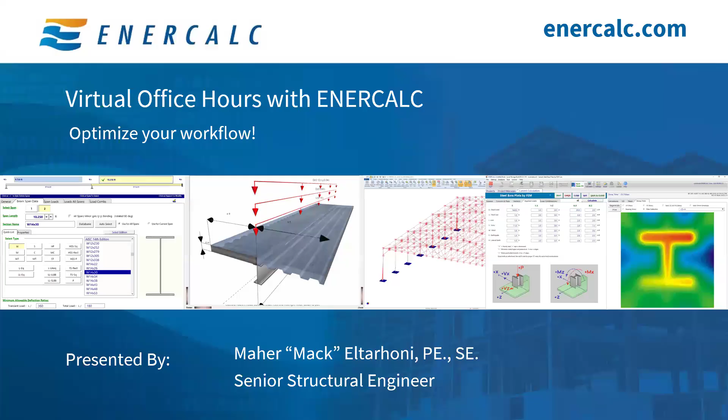As Seth said, I am Mack Eltarhoni, and I am excited to be presenting to you today not just one, but two modules from ENERCALC's library of diverse and extensive modules.

So I would like to start our session just like always with a brief overview of the overall agenda. The items that we're going to be covering today would be a quick announcement about the PDHs, then ENERCALC's latest build, what's new in ENERCALC, and then we're going to dive into the Rebar development module, live, and then the live load reduction module. After that, we're going to go briefly over registering for office hours to get notified in the future and wrap up with live Q&A from the audience. So feel free to drop your questions throughout the presentation.

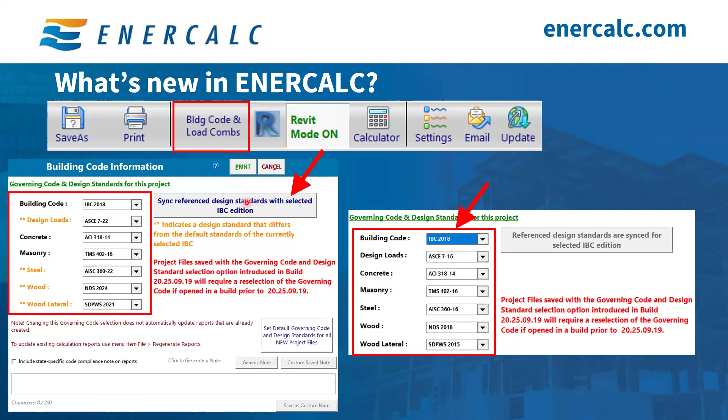Keep in mind all the code changes that you implement by clicking on this button right here, all of the stuff we just talked about, is only relevant to that specific project file or ENERCALC file that you're working on. So this only applies to the calculations housed within that file.

Now, if you want this code that you selected to be used as default for all of your future calculations, even if you create a whole new ENERCALC file for a brand new project, and you want to use the same IBC 2018 over and over again because that's what you have in your jurisdiction, then you need to click on this button. What's cool about this Set Default Governing Codes button is that when you click on it, you get this window and it will show you what the old default was. You can see here, building code was IBC 2018 and the ASCE 2022.

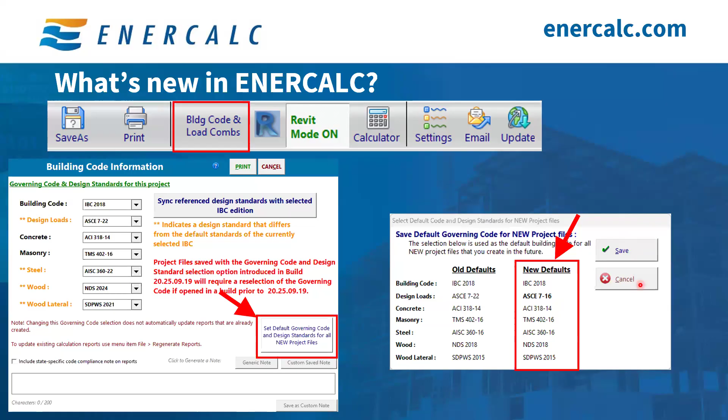They're the same ones that we talked about here. So those are the default codes, and the new codes that we want are the ones we wanted to change to 2018, having 2018 to match everything. So those are the new codes. You click save, and then voila, you'll have everything the way you want it.

Now, it is important to note that these new tabs will only show up if you have ASCE 7-22 selected in your code. So if the design loads that you're selecting is ASCE 7-22, then these three new tabs will start to show up. Now, if you are on an older version of ASCE, so if you're on ASCE 7-16 or older, then ENERCALC reverts to the old options with the menu to select the load and forces module the way that you typically used to do before the implementation of ASCE 7-22.

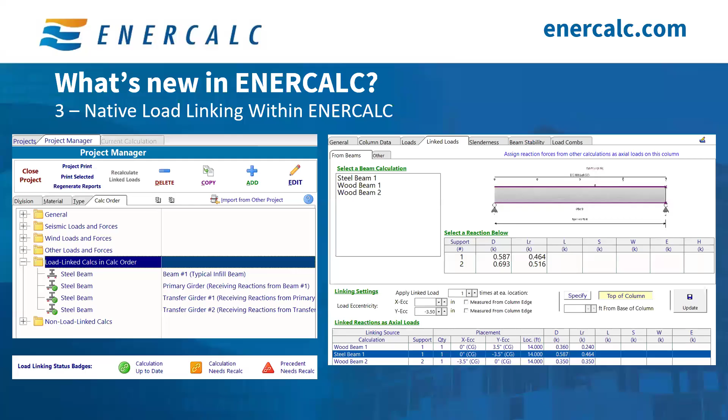So again, load linking is currently available in steel beams, wood beams, steel columns, wood columns, and more integrations to come. And if you'd like to learn more about load linking, we created a playlist of short videos on YouTube to walk you through how to use load linking step by step so you can start leveraging this tool in your workflows. And I also added a new video recently, in the past couple months or so, to the YouTube load linking playlist for a full practical example of how to use load linking in real life design applications to transfer reactions from beams to columns.

And the good thing about this example is that it covers different materials, so you can take it from a wood beam to wood beam, or from wood beam to wood column, steel beam to wood column. So there's a lot of mix and match going on here and back and forth. So this shows you the versatility of the tool. So again, overall, load linking is a powerful tool that allows engineers to create a well-connected chain of calculations while minimizing the risk of transcription errors.

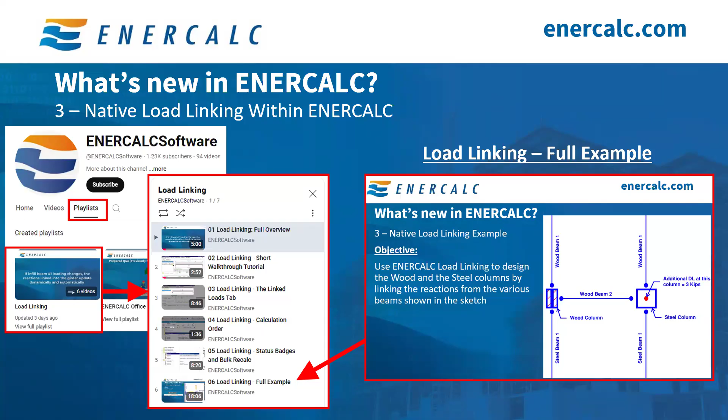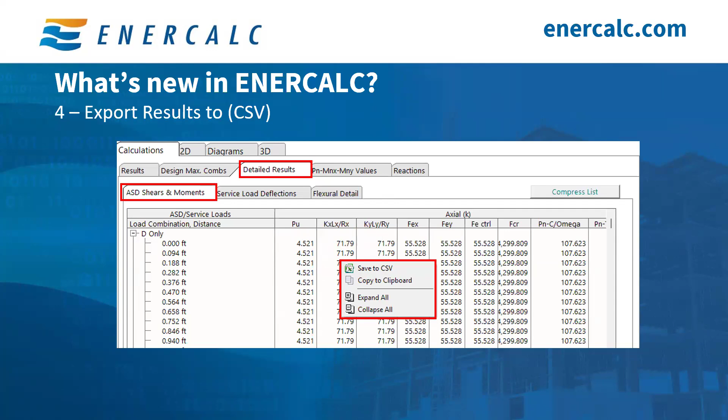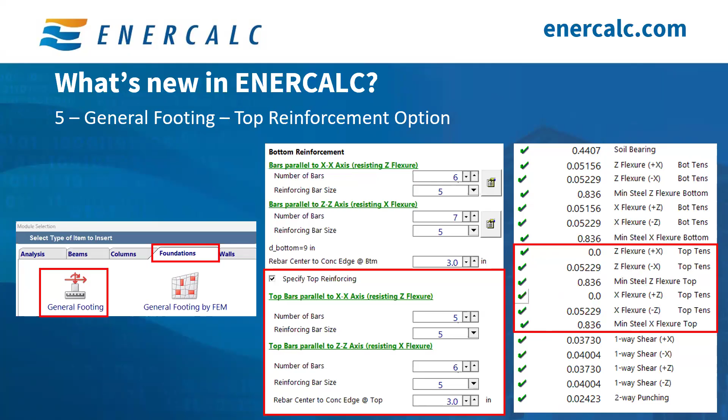And of course, another item that's been really exciting is ENERCALC for Revit. Especially for those who already use Revit to produce their drawings, this is a no-brainer. ENERCALC for Revit is just a simple plugin that goes directly inside Revit, and you can design structural members fully within Revit without having to export an analytical model or do anything outside of your normal routine. It's a simple point-and-click workflow that allows you to design a member, of course, in a fraction of the time that it would take you otherwise.

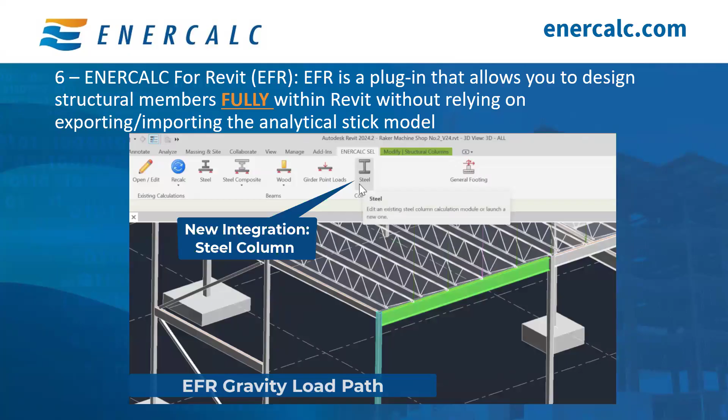But this is not just about time, but it's about transcription errors. You don't have to manually carry reactions. You don't have to manually change sizes. You don't have to do anything. Whatever change you do in ENERCALC, it automatically gets implemented in Revit, and vice versa. Whatever you do in Revit, it will change in ENERCALC.

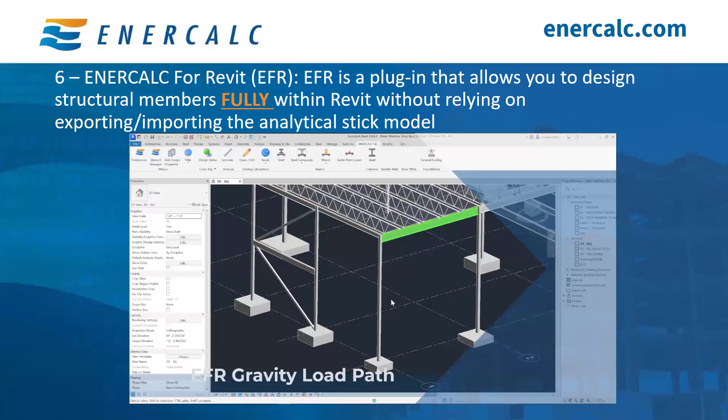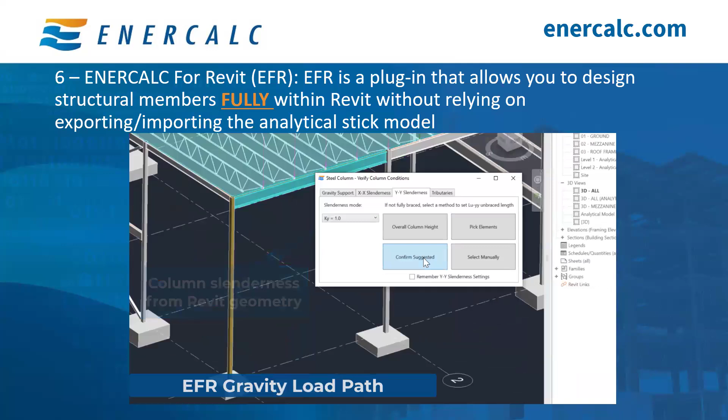So the best thing about it, you can click on a beam. It automatically knows the loads, and if it doesn't know the loads, it'll allow you to tell it where the loads are. It's just guided prompts that if you follow them, you can finish the process very quickly, and it keeps track of what got designed, what didn't get designed, and of course, keeps track of all of your reactions. Currently, ENERCALC for Revit supports the design of steel beams, steel composite beams, wood beams, steel columns, and foundations. And so you have a full gravity system that's included in here.

And the best thing about it is that if you're in ENERCALC and let's say you change the size from a W8 to a W12, once you click Save and Close, it will automatically bring you back to Revit, remodel that size in real time in 3D space, and you will always have documentation that is 100% accurate to your calculation file.

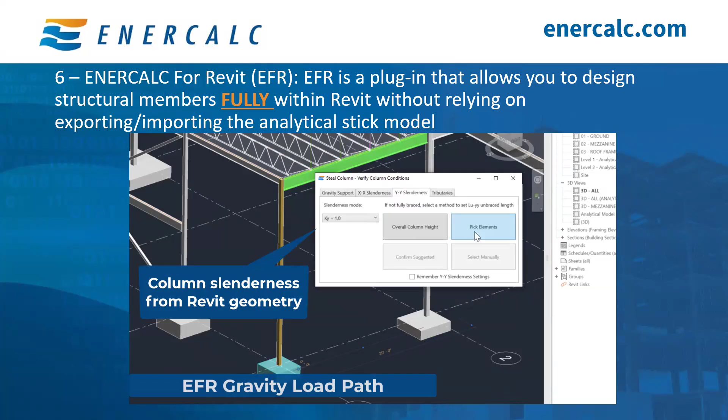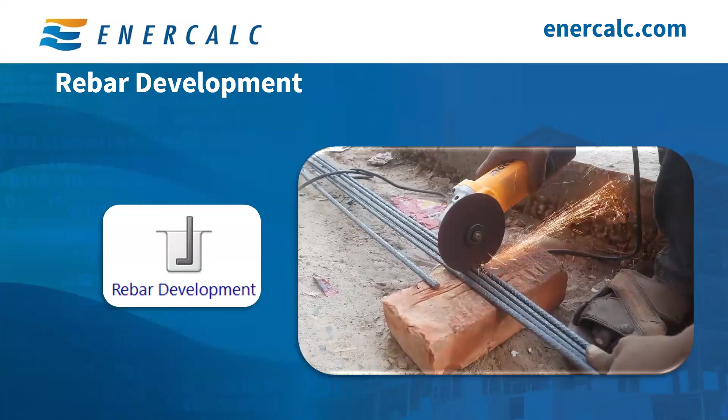So moving on to the focus of today's presentation, the first topic is the Rebar development module. So for rebar to be spliced or embedded or even just put in structure in general, it needs to be long enough to develop the forces from one side to the other side. So ACI 318 covers this topic in depth. And in today's session, we will focus on the 2019 version of ACI 318.

So here's a quick overview of the capabilities of this module. It performs ACI 318 compliant analysis of rebar to determine the required development lengths. You can perform up to 15 rebar development calculations housed under one calculation file. So you can just open one and you can have 15 housed right inside of it. This way you don't have to create too many calculations. You can have multiple of them in one place.

ENERCALC performs 3 calculations for each rebar. So it does the straight development, hook development, and splice lengths. And for straight and splice length developments, ENERCALC reports both the tension and the compression development lengths. And of course, you can export everything to a PDF that you can include in your calculation package.

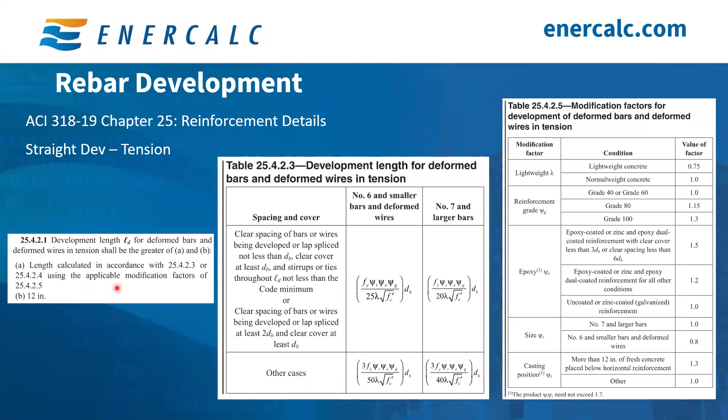This equation, that's an important item here. This equation is different from the equation noted in ACI 318-14. So the 2014 edition of the design standard has a different equation. Also, the new ACI 318-25 has a different equation for the standard hook in tension rebar development length.

So that's why it's very important that you perform these calculations based on the ACI version that's used in your project. This is especially critical to those who have a pre-populated table already as part of their drawings in their general notes or in their typical details. Because if that's what you have, then you need to make sure that you look into it or revise it, or make sure that you're using the correct information based on the ACI that you're using for that project, since the values will be different for standard ACI hooked bars.

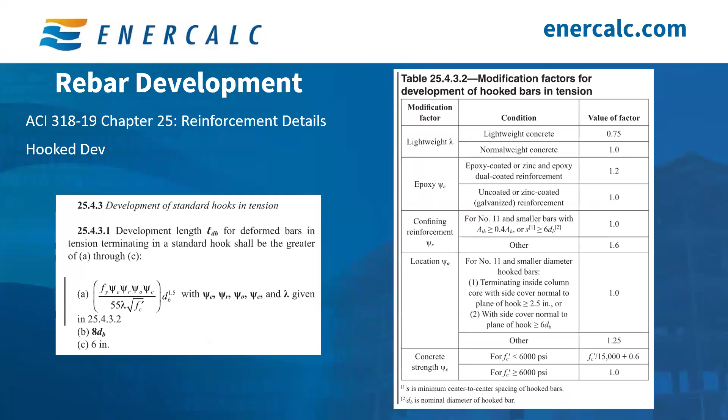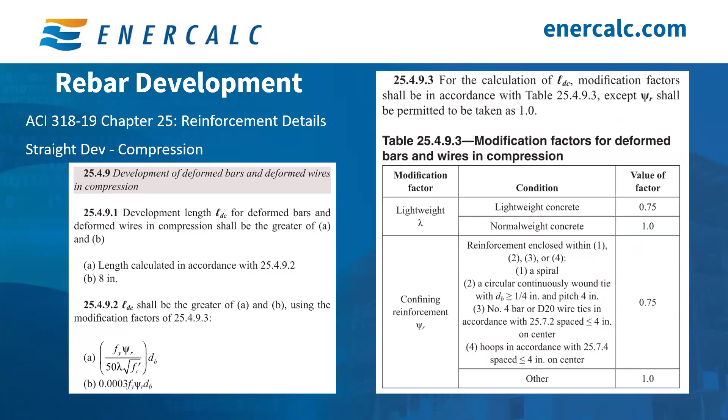And I think the last item we have here as far as code prescribed methodology or design standard methodology is this section right here, 25.5.5.1, and that is splice development, or lap development, for the compression side of things. So this one, they kind of changed it up a little bit. They wanted to make it a little complicated.

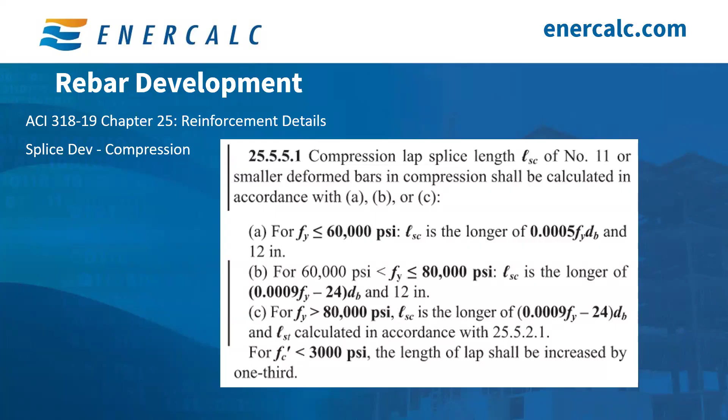Once you figure this out, because it might not be 12 inches, it might be 1.3 LD or it might be 1 LD or whatever. So they want you to look into this and then look into the number that you get from here, and of course pick the longest. So this one is a little bit of a nested loop that they send you through. But most people are in category A, a few people in category B, and even fewer people in category C as far as rebar goes. So either way, all of this is implemented in the ENERCALC module that we are about to cover.

So right here, the way that you're going to start a rebar development calculation is the same exact process that you do for all of your calculations. You go to this add button, and then you will get this window with a bunch of tabs. You click on miscellaneous, and then you click on the rebar development module, and it will open up. So first, we'll start by giving this calculation a name. I gave it the most generic name you can think of, which is rebar development calculation.

Next, this calculation has different tabs, and this is what I was talking about earlier, where you can house up to 15 different rebar development calculations under the hood of one calculation. This is nice, so it doesn't crowd your project manager list with a bunch of calculations that you can just house here in one place. So we'll click on bar number 1 because that's what we're working on, and as you work your way through the project, you can add more of these here. So bar number 1 is what we're going to be working on.

Next, you get this little option right here, and this is print this information. This is an option for you to print or skip printing this particular calculation. So if you click on bar 2 or bar 3, you'll always have an option there that you can print selectively which ones of these you want. Because sometimes you want to run a number, but it's not really part of your calculation package, so you don't want it to be printed, but you do want it to be there for internal reference. So this allows you to do just that.

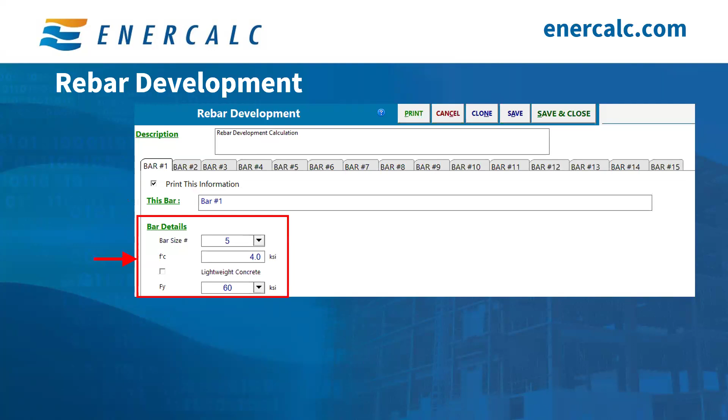Next, very simple. So we're ready to provide some information regarding the rebar to ENERCALC, so ENERCALC can start cooking. For our example, we have a number 5 rebar, and we have an fy steel of 60 ksi. So ENERCALC now knows where to look based on this range. And we have 4,000 psi or 4 ksi for the concrete compressive strength. And we are good to go here.

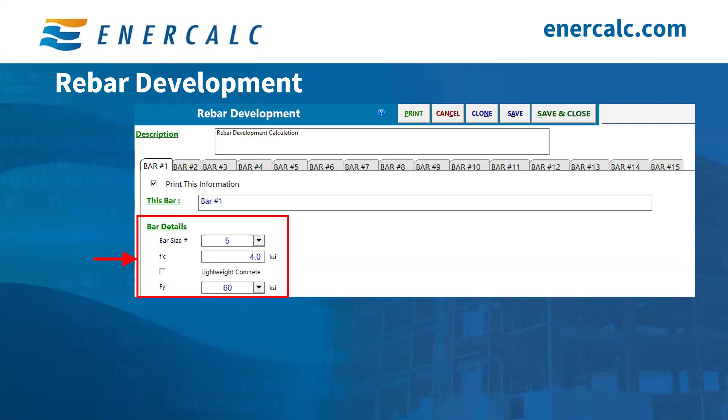Now, this part, we have normal weight concrete, so we do not need to check this option. If this was lightweight concrete, you check this option, and ENERCALC will know to bring the proper modification factors for lambda in the calculation if it is lightweight concrete. For example, it's normal weight concrete, so we're good to go. And then we move on down the list. So from the previous tables, we can pick the psi factors.

So this right here is the straight development. That's the first one that we're going to talk about here. You have a bunch of psi factors here. So lambda is automatically picked for you because you already have normal weight concrete, so you don't have to worry about that. And then you have the epoxy factor, the confining reinforcement factor in compression, and you have the casting position factor. Those are manual entries because the user will have to pick which one they want, because they have to look into the appropriate table. So in this case, it's this table right here, 25.4.2.5, modification factors for development of deformed bars in tension. So this is straight bars in tension, so you pick that. So we're going to keep them at 1.

Now, the reinforcement grade factor, which is psi g, and the same thing for the size factor. Those get automatically picked up and generated by ENERCALC. And of course, because those are based on, for example, the size factor: for number 6 rebar or smaller, it's 0.8, and for number 7 rebar and larger, that would be 1. So it already figures this out for you. And the same thing for the reinforcement grade. If it's 40 or 60 or 80 or 100, it picks the proper values for you. And again, the other factors, you can just manually input them as a user input.

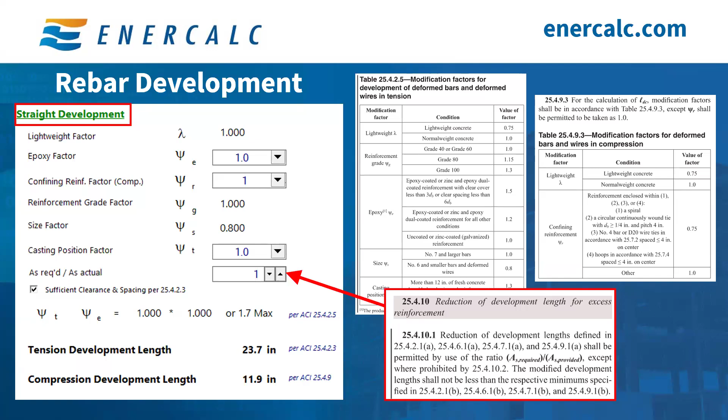and it's pretty common to have the seismic design category D. So it's just important for you to be aware of the limitations because ENERCALC will not know this, because ENERCALC doesn't know what's going on with your building. So that would be something to use with caution. Moving on here to this part right here.

This says sufficient clearance and spacing per 25.4.2.3, which is this. So if this part of the requirement is satisfied, then you check this. If it's satisfied, then ENERCALC will know to use the top set of equations. Because you already have all the clearances and everything else that you need, you meet these conditions here, then for number 6 rebar and smaller, you use this equation, and of course for number 7 and larger, you use this equation.

Now, if you uncheck this, then ENERCALC will move on to use these equations right here at the bottom. So this is very important for you to check and ensure that indeed you do meet or do not meet those spacing and cover and clearance requirements.

Another thing worth noting is that the casting position factor and the epoxy factor, so the psi T and psi E, multiplied together shall not exceed a max value of 1.7, and this is per the footnote that is in this area here. So per ACI 25.4.2.5, there's this footnote right here that provides this upper limit. So nothing for the user to do here.

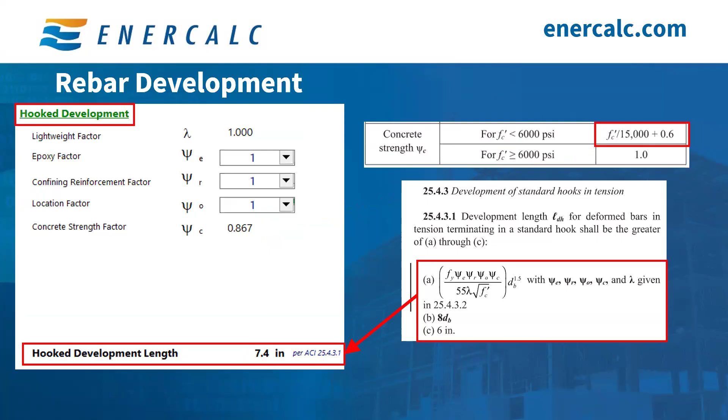Once it figures out the factors, then it's ready to apply them into the equations that we discussed earlier, and it picked the greatest value of all of these, or the controlling value, and that is 7.4 inches if this rebar has a standard ACI hook at the very end.

Next, ENERCALC calculates splice lengths. Since the area of steel provided divided by the area required is less than 2, that's what we were talking about earlier, this automatically pushes us into a Class B splice right here. The way a Class B splice works is that you take your straight bar development and multiply it by 1.3, and the minimum is 12 inches.

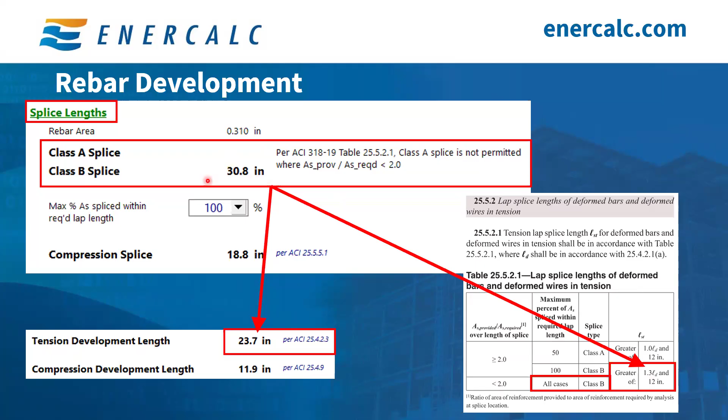So again, ENERCALC goes through this and it provides you that this is a Class B splice, and that's 30.8 inches. And then it goes through the same process for the compression splice, and you can see that A is the one that controls because Fy is equal to 60,000 psi. So we're not in condition B and C, but if we were, ENERCALC knows what to do as well.

So this concludes the rebar development side of business, and we are ready for the second part of our presentation today, which is the ASCE 7-22 live load reduction module. ASCE 7 allows the engineers to reduce the live load that's being supported by a structural member based on many factors, such as the function of the member, the area or the function that it serves, and of course, the total tributary area to that member. So I'm gonna do the same thing, cover the ASCE equations and tables, and then we'll go through a quick example. This is a short module.

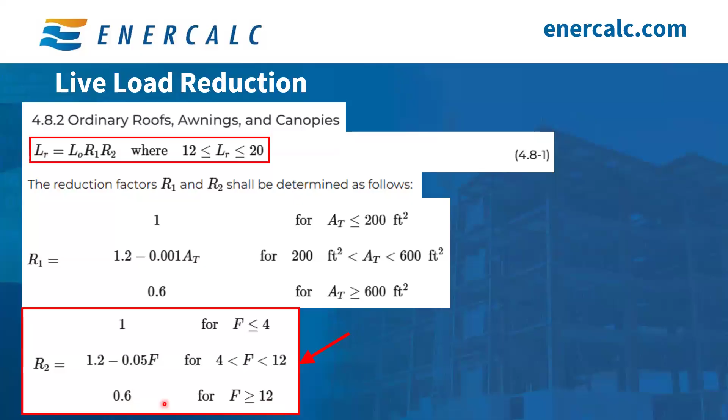You give it the area, and you give it the pitch, and it automatically calculates R1 and R2, and it tells you what that reduction is, and it knows that 12 is the absolute minimum. So if you do the calculations, it'll be slightly below 12, but the 12 controls.

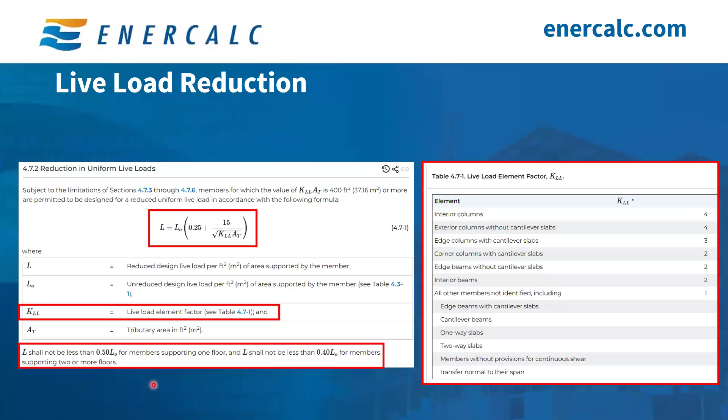Next is those floor conditions. So you can say, okay, interior beam, interior column, and you can pick here that this is a floor live, not a roof live. And then if anything supports 2 floors and more, you click on this. Otherwise, you're good. This knows if it needs to bump you against the 0.5 or the 0.4 value that we just talked about right here.

So moving on, you have the area. So you can input the area. And then this part right here is the K factors. Those are drop-down menus. So if you click on this, you'll get this menu to help jog your memory a little bit and say, okay, well, if it's an interior column, it's a 4. This is an interior beam, so it's a 2. The one below it is an interior column, so it's a 4, and so forth. So you can just pick them from here.

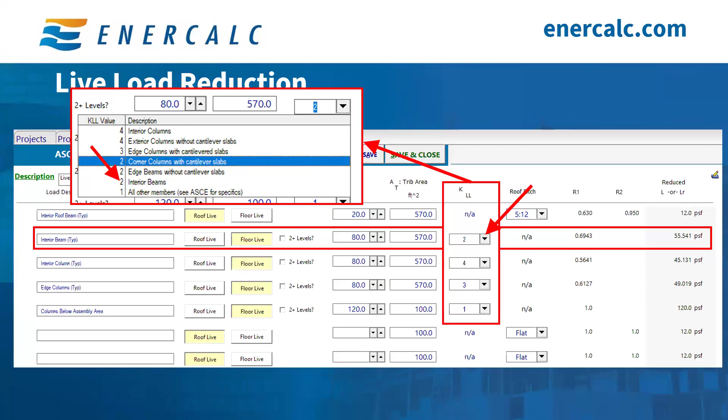And of course, there's no roof pitch to this, and it automatically calculates the reduced load for you. So in this case, you went from 80 to 55. And now you have all of your reduced loads in one place, and you can finally apply those reduced loads to your calculations.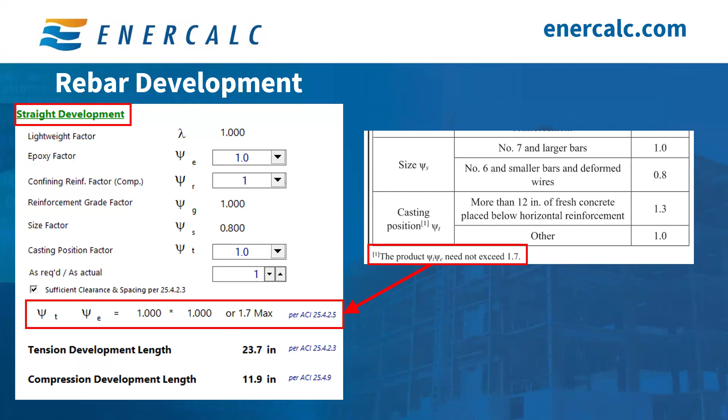You see this calculation right here. So for the straight development of rebar, if you use any of these equations, you can see here that this is psi t and psi e. This is part of your equation. The product of these two numbers cannot be more than 1.7. And this is the footnote right here. If you ended up picking a psi t and a psi e that result in a number more than 1.7, let's say 1.9, then you do not use 1.9; you're limited to 1.7.

And that is a good thing because the larger the number at the top, the larger the development length becomes. So at least it's good that they are indeed limiting this number right here to 1.7.

I'm not thrilled about the fact that I got distracted and pronounced psi as PSI. I was thinking compressive strength. Oh well. Yeah, I figured. Oh well, that's all right.

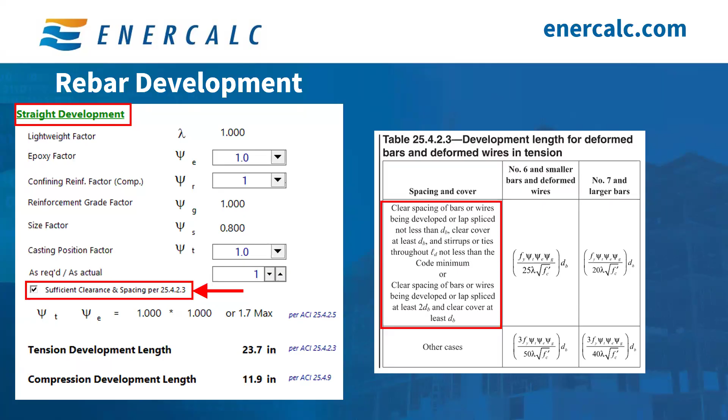All right. After the previous update, I opened a previous project and received an error indicating timber properties were missing. Is this an issue? Corrected in an update, possibly an issue on my computer? All right, Timothy, I'm going to recommend that you reach out to the support team if you're having a specific issue in a project file. I don't think there are any known issues specifically with failure of timber properties, but feel free to send over your project file to support@enercalc.com and they can take a look at that for you.